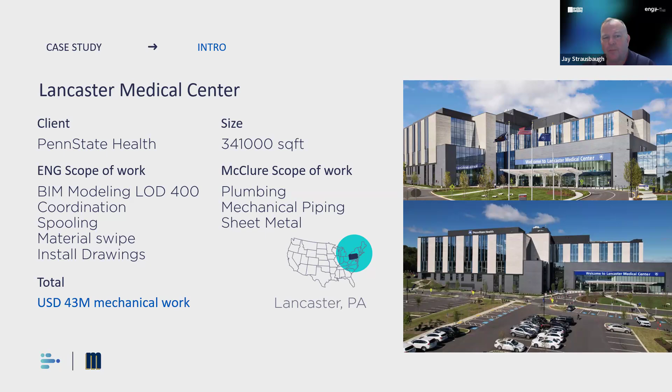German, you mind giving us some takeaways from the project? Okay, yeah, well, thank you, Jay. We have a couple of takeaways that I will walk through. As you can see here, we have the design stage, also the coordination stage that also involves BIM. And after that, we have the spooling stage, and then we go to the shop where we have the deliverables to the fab shop, as well as the labor itself. And after that, we have the construction stage. 4 and 5 will be taken by Jay Strausbaugh, and I will start with the first one.

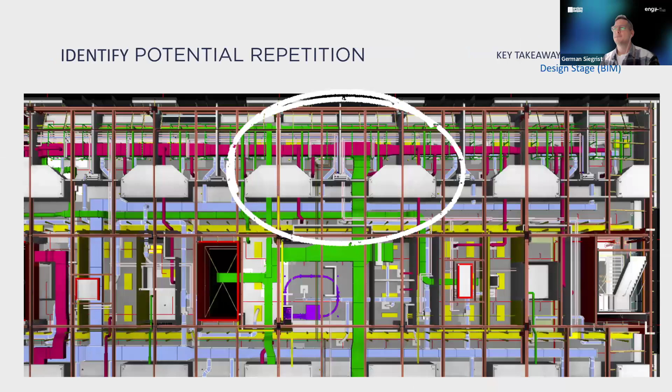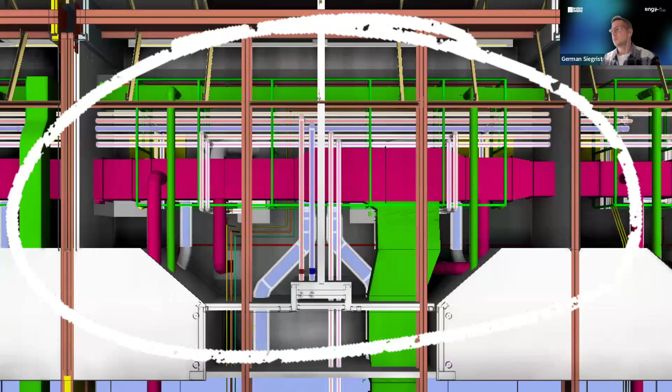At the beginning, this is a process where we start by identifying the potential repetition. As you can see here, we have a couple of patient rooms that mirror each other. So here in this context, we are looking for a common pattern that is on the screen. And it's mirrored, and so we can start looking for those places.

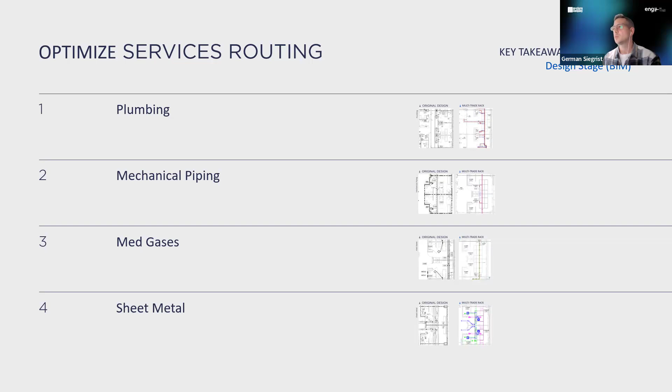Moving on, in the design stage, we work with designers to try to identify and look for the opportunities to shape the model and to move those elements closer to the final location of those racks that we will propose. In the plumbing model, as you can see, we have the cold water and the hot water at the left side. It's the design intent, and on the right side, you have the final as we have it in the model. And in the middle of the screen, you can see the rack itself. And it's a hard process. We try to streamline, be as efficient as we can, and have the pipes as straight as we can.

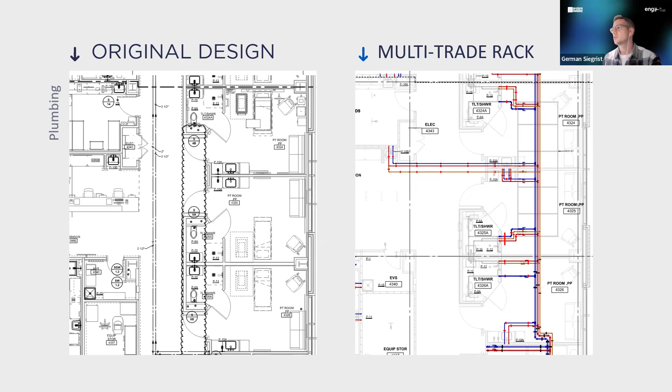Here for the mechanical pipe, it was pretty easy because the pipes were located very close to the final location of the rack. For the med gases it was the same. We just adjusted the elevation.

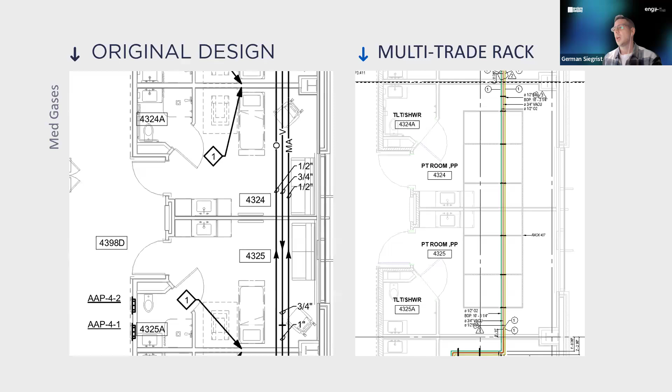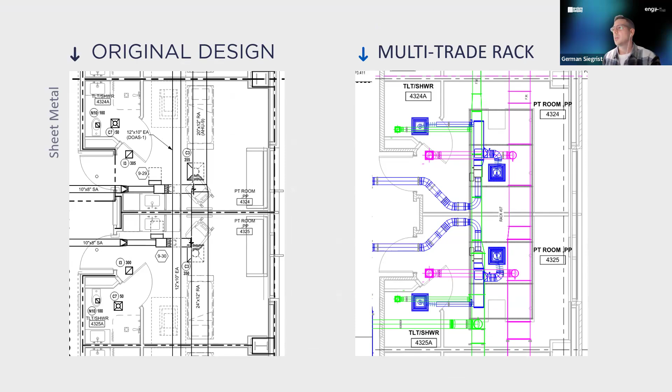And then we have the ductwork; it was a little bit harder. We adjusted and shifted the VAVs inside the racks, and also we resized a couple of low pressure ducts. And at the end it worked perfectly. Let me move to the next one.

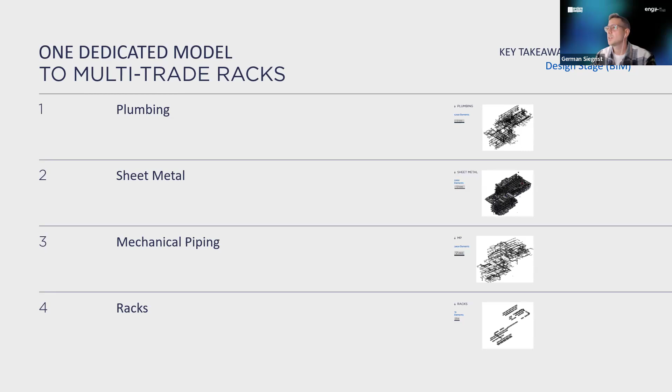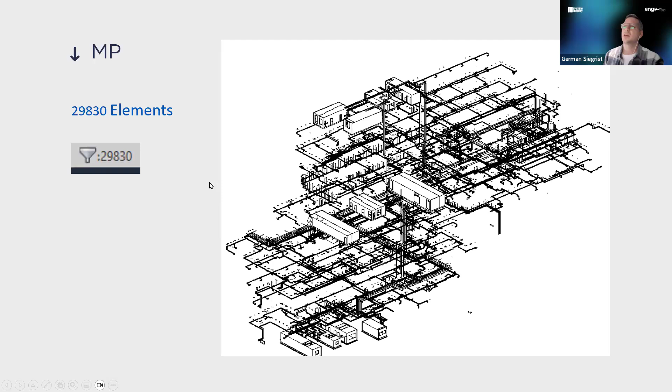Here, I'm going to walk through the count of elements we have in each model, so you have a better idea of the final size of the models. So this is the plumbing model. We have over 52K. In the sheet metal model, we had almost 53,000 elements. As you can see, the screen is fully crowded. On the MP side, we have almost 30K elements.

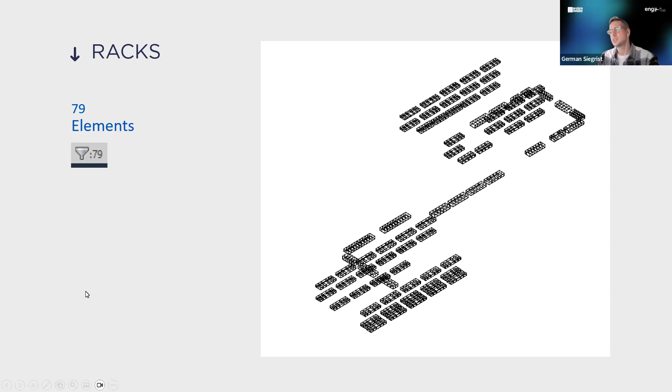And as you can see, the racks were 79, and they had almost 60 nested elements per rack. It gives us around 4.5K elements in the model. So if you combine all those together, you have 140,000 elements. That plus the sheets, all the detailed elements, plus the schedules, is the size of the model. It's super huge, and it will be unmanageable at the end of the project. So that's why we have that recommendation.

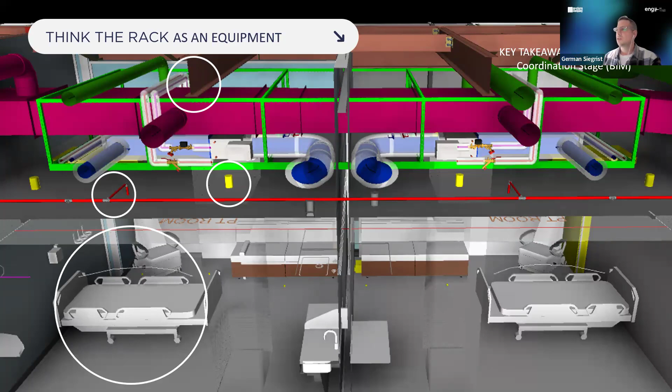Moving on to the next stage. On the coordination stage, we like to think of the rack as a piece of equipment, and everything that surrounds the rack needs to be coordinated with it. Here you can see how we coordinated with the structure, with the lighting, with the fire protection, as well as with the clearance that the lighting has. Also, we very often see that people overlook the head walls, the patient lifts, and the king studs.

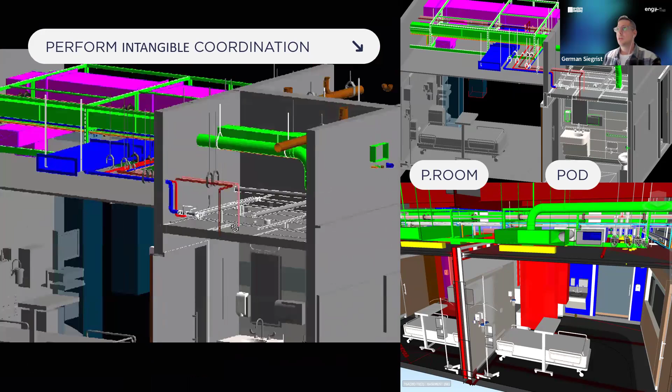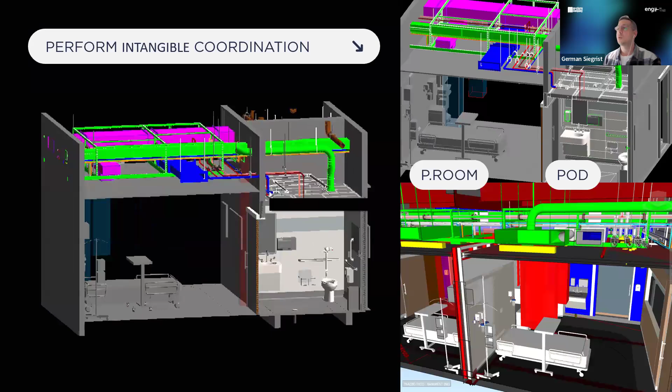So that brings us to the next topic, that is, we perform the intangible coordination. What do we mean with this? Sometimes the other prefab structures that we have inside the model require space, and they require some lanes to go in the building. So for instance, if the pod is 9 feet tall and you have that on wheels, it will require an extra foot to maneuver them. So nothing below 10 feet can be installed before those pods go in. And remember also that the racks will be on wheels as well. So everything needs to be higher than 10 feet. Moving on to the next one.

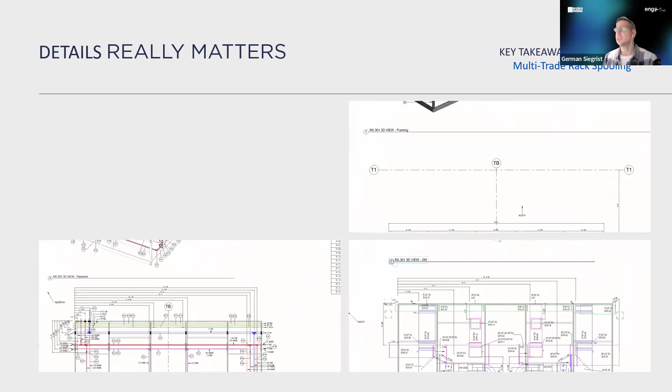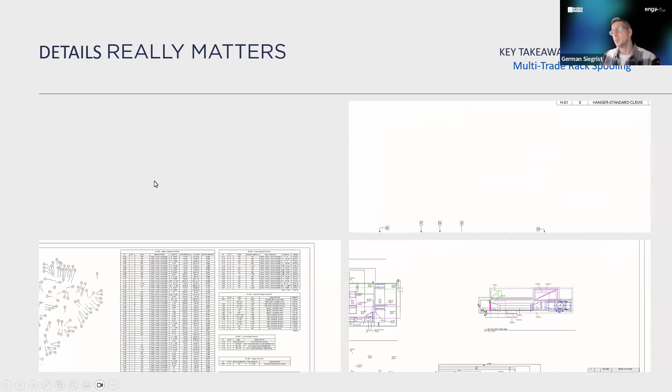Okay, yeah. We like to say also the detail really matters. Sometimes we have the idea that small, seemingly insignificant details cannot have a major impact on the project's success or failure. But that's wrong. If the information that we provide to the shop isn't clear, isn't organized, isn't easy to read or easy to handle, at the end of the day, the shop will have a lot of hesitation and a lot of queries. So that's why we created these deliverables and try to detail as much as possible.

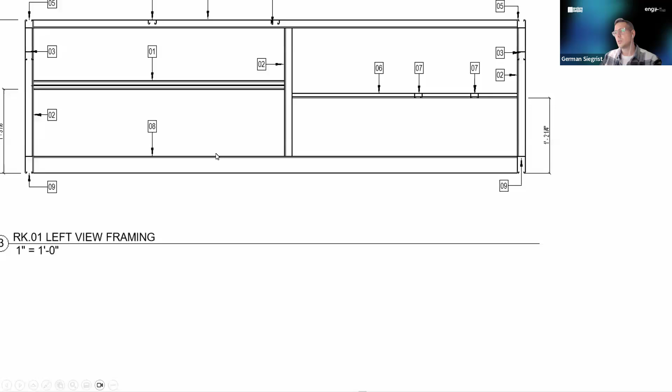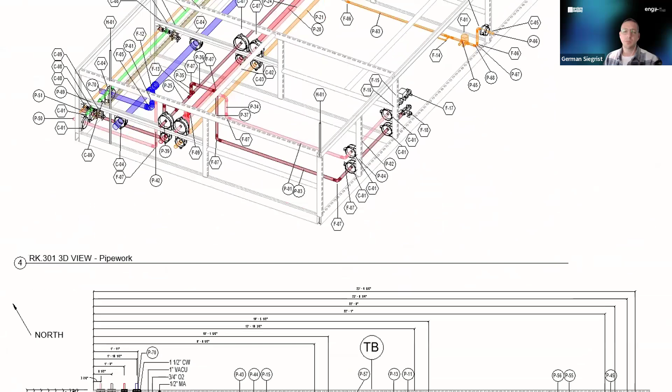Here, as you can see on the screen, I'm showing the framing structure we have. This includes the cut length of the frames, the weights, the quantity. If I move to the piping one, we detail out every single pipe, the fittings, the closure clamps, the valves, the hangers, everything with the quantity. Also, we include some calculations, the weights of the pipes and the weight filled with water.

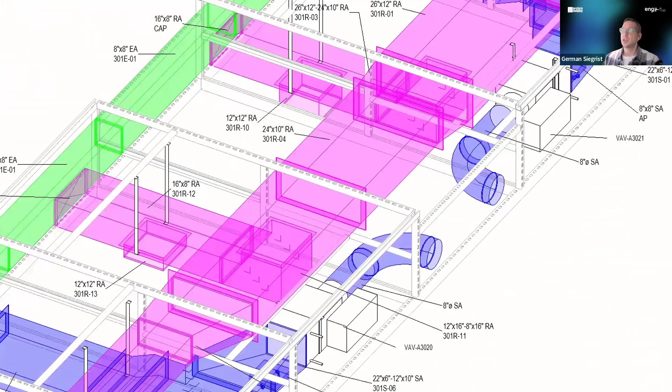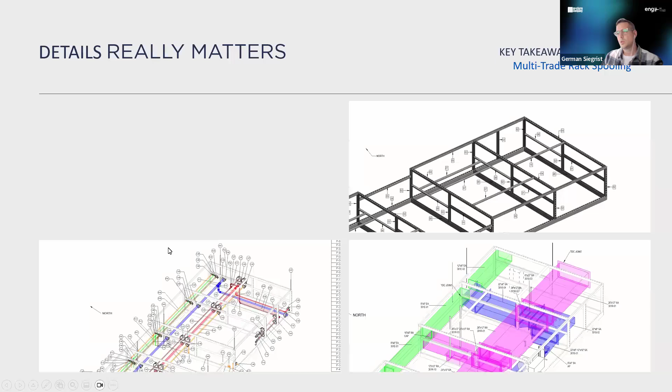And for the sheet metal, it was mostly the same, but we added an extra clean floor plan for a clear view. And this information is super helpful for the shop, and it helps at the end of the day. Moving on to the next one, yeah, this is one of the shop takeaways.

So what we mean with the communication with the shop, we mean with the VDC team and the shop. They need to have an open line of communication with the shop, because they will have questions and we need to answer those questions, or maybe they need to give us a tweak, or they need to incorporate some changes, and that's super helpful. Jay?

Yes, and the way that we achieve that is by having reoccurring meetings. It happened with the construction team, also the fab shop, and our VDC team. These meetings were to ensure that everybody was adequately equipped with the necessary drawings, materials, equipment for prefabricating the racks. Our concise, focused meetings were promoted to promote accountability amongst all the people involved.

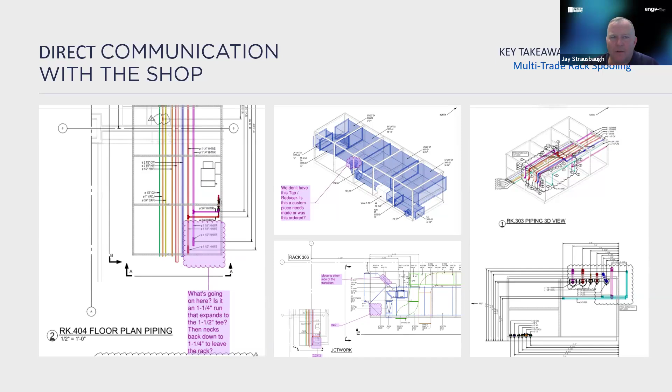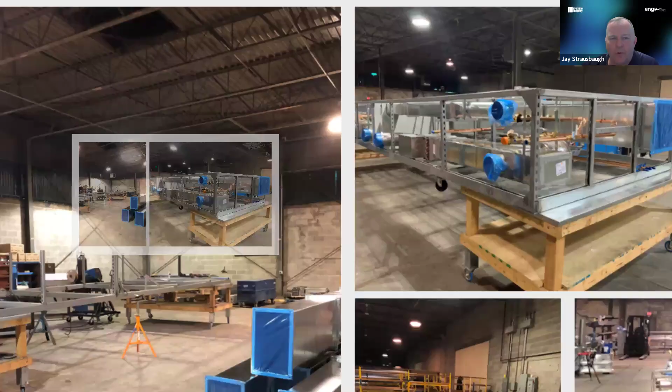So some of the things that we like to really focus on in the shop for key takeaways is the workflow efficiency. As you see in some of the pictures, our workflow in the fab shop is set up with stations that create an efficient workflow. The stations look very similar to our VDC drawings, where each station has a different part of the multi-trade rack being constructed. This also allows for a nice, safe working environment.

As you can see in the pictures as well, organizing the multi-trade racks is also necessary, so the shipping of the racks are easily accessible. As you can see, the walls, the duct, the pipe, and the electric are all coordinated to create the efficient multi-trade rack.

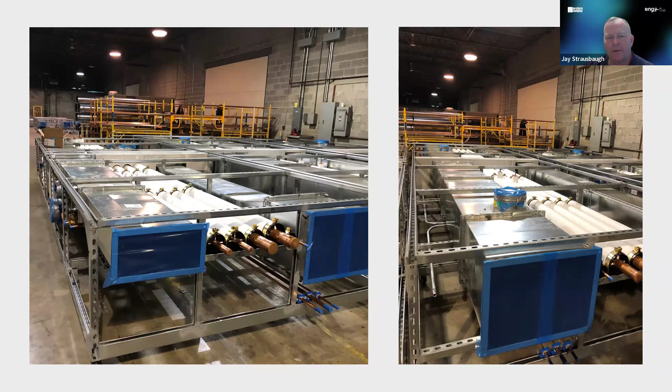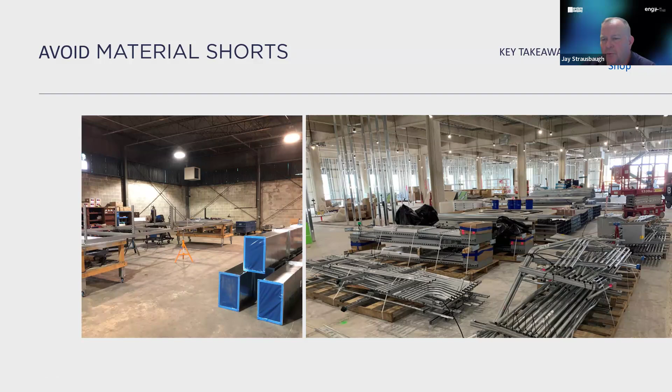So the next takeaway is to avoid material shorts, especially during the pandemic. It required extra time for some back orders, and sometimes those back orders cause lost shop time. So we worked very hard to have accurate bill of materials so that we could get the material purchased. Multi-trade racks require specialty materials. Some of the clamps and some of the straps are special order for us.

So the next takeaway is moving the multi-trade rack from the fab shop to the job site. Our goal is to build the multi-trade rack as big as possible so that we can gain efficiency. But this requires sometimes some special rigging and equipment to move the multi-trade racks. To date, we have not utilized any customized wraps for our multi-trade racks, so we have to base our deliveries on the weather conditions.

The other thing we focus on is coordinating our deliveries with the general contractor so that we can utilize the site crane. This allows the job site to not be as congested with more equipment on it.

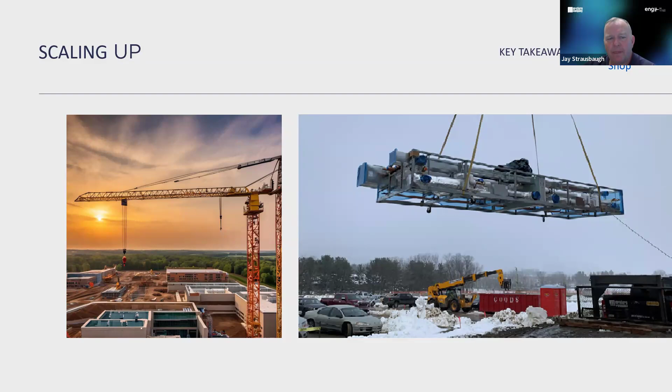The next takeaway we have is the coordination of the actual moving of the multi-trade rack within the building. The construction stage requires a lot of pre-planning and replanning. It's very important to focus on the upfront coordination. The pathway that is required to get these multi-trade racks in, as well as the prefabricated bathrooms, require coordination with all trades. Coordinating the pathway for the multi-trade rack takes up a lot of space, and as Germain mentioned earlier, the height is very important to make sure that things are not in the way.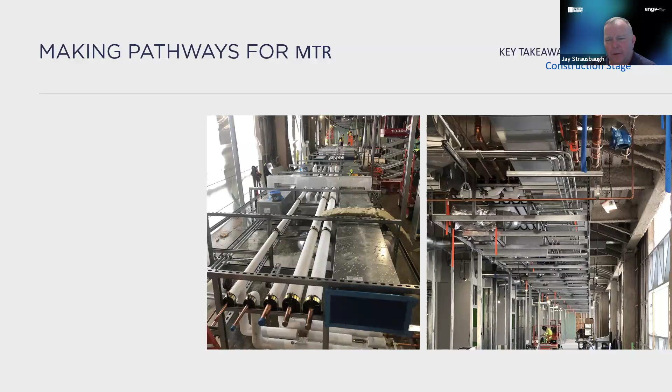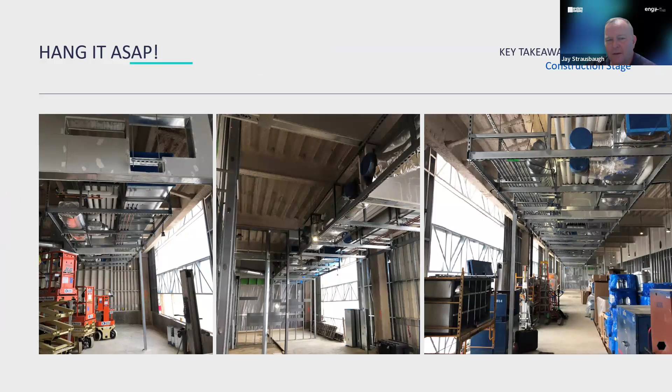Another takeaway we have for the multi-trade racks is to hang it as soon as possible. They will be in the way. Usually the multi-trade racks are the highest prefab that gets installed, so we like to get them in the building and installed first. And as you can see by the picture on the right, when they're all installed, they look awesome.

So part of our activities on site was to create a case study for some of the results. We focused on the different stages of the prefabrication, the installation of it, and so we would like to provide some of the results now.

So some of the numbers, we experienced a 20% schedule savings. This was due to 50% less workers in the field. And in our direct labor costs, we experienced 30% cost savings for the direct labor.

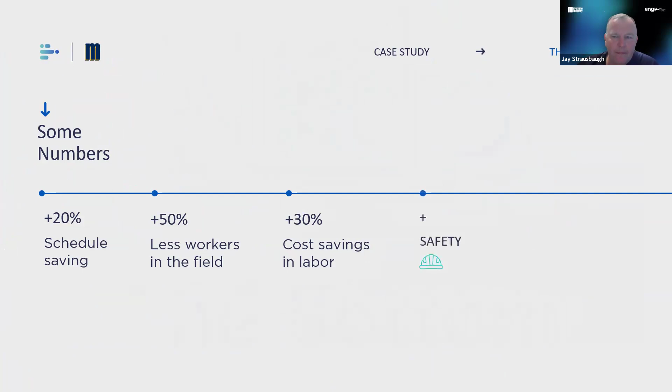There's also some other savings that are hard to calculate. And some of that is the safety. We have not had any recordables on our installation of the multi-trade racks, as well as we felt like the quality was better due to the multi-trade racks being built in the fabrication shop.

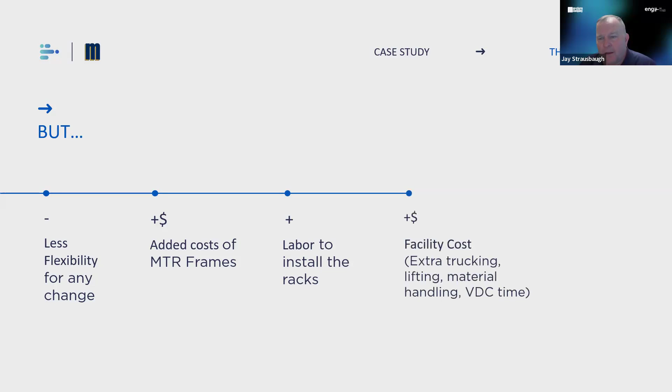There are a couple of downsides to it. So there is less flexibility for multi-trade racks, and there's a lot of added cost. Some of the clamps and the cost of the actual multi-trade rack frame is added cost, as well as the added cost to install the multi-trade rack once it's on the site and to hang it in the air, as well as facility costs. There's extra trucking, extra lifting, extra material handling, and VDC time.

So really, the bottom line is it's hard to find actual dollar savings with prefabrication of multi-trade racks, but we can see cost and schedule certainties throughout the project.

Wow, Jay, those are some great numbers, and it looks like a lot of great lessons learned out of the project. You know, you got the cost certainty. It's always great when a plan comes together, and a lot of risk mitigation for McClure and for all the partners and for the owner in delivering a really complex project. So kudos on that. What are some of the golden rules that you picked up out of this project? Can you explain some of those?

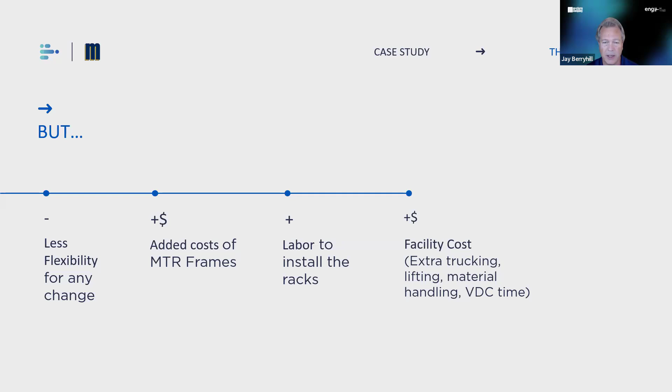Definitely, yes. We had a lot of takeaways, a lot of what we called golden rules for implementing and continually to improve. Our first rule is put me in, coach. Don't be scared to participate or lead a group that pursues multi-trade racks. And when you do that, consider the following: have some core values for the teams and goals for the project. Realize that planning and developing multi-trade racks and implementing is very time consuming. You will need buy-in, of course, from a lot of different departments, from your fab shop to procurement, project management, everyone.

Our third takeaway is to build your fantasy team, right? Diversify your team with different backgrounds. Build that team with people who have different fields of expertise as well, but make sure that they have one common theme, and that is innovation. We also found that our team worked best when we had accountability meetings to make sure that everyone had the right information and the right time frame to perform their task.